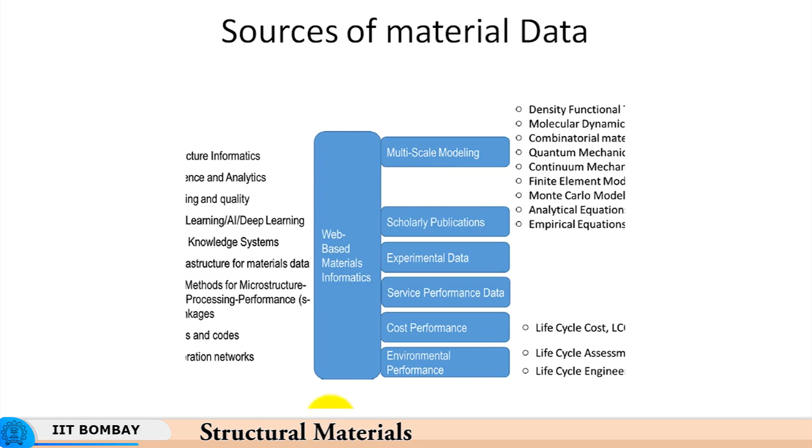You have standards and codes as sources of material data, but then these are kind of rigid. So, these are not dynamic in nature. Standards and codes are the ones which remain unchanged over a period of time, but as you go on analyzing data coming from various sources, you might have to revisit the standards and codes and change them from time to time. So, this is how you have both static as well as dynamic sources of data coming in, and therefore an adaptive design approach needs to be deployed.

So, it integrates a database that is built based on domain knowledge. Domain knowledge is something which is well established facts. So, it integrates a database that is built on domain knowledge and includes material data of targeted properties and descriptors, a regressor, that is statistics based algorithms to regress targeted properties versus descriptors. So, basically you would like to correlate the targeted properties with the descriptors, meaning control parameters. Descriptors would mean parameters which are under your control, which would influence the targeted properties to the maximum extent.

So you would have a regression, or a relationship between the two, and then you would have a statistics based algorithm to design new experiments or computations by optimizing the selection from exploration and exploitation of regions and feedback from experiments and computations. So what it means is that it is not just the correlation that is important, it is the tool which you use for correlation, whether it is a neural network or a regression based model or statistics based algorithm. So whichever gives you the best accuracy of prediction has to be utilized in order to correlate the two.

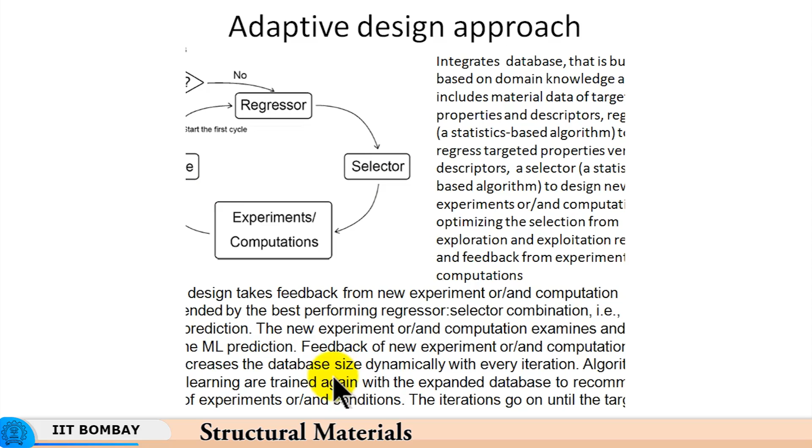So we come to what we call black box models and white box models. Black box models are accurate. They correlate the control parameters, namely descriptors, with the outcomes, namely the targeted properties or targeted material behavior. These black box models are accurate because they are based on reality, that is, they relate real descriptor data with real material performance data. On the other hand, we have white box models which are easy to explain because they are based on the laws of physics.

They are able to correlate descriptors with the targeted properties in a definite expression. But they are less accurate because many assumptions have been made. Many things are neglected because you want to keep the model simple. So what you are essentially doing is correlating the descriptors with the material properties in a more ideal situation compared to reality.

So that is how black box models become more accurate, because they correlate real descriptor data with real property data, whereas white box models are easy to explain from the viewpoint of the physics of the relationship between the descriptor and the desired properties. Black box learning models are like artificial neural networks, machine learning models, deep learning models and so on.

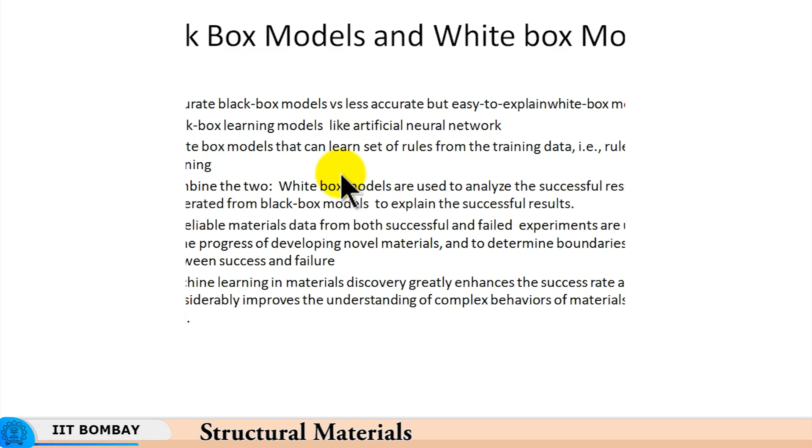So when you take a black box model, you have a prediction which is likely to be successful, and the white box model will do the explanation. So what will machine learning do? Machine learning, which is essentially a black box model, does many things. It integrates heterogeneous material data. So, material data that has typical characteristics of heterogeneity on account of multiple sources will get integrated.

When compiled into open accessible databases, the materials data finds applications in materials discovery, material selection, failure analysis and life prediction. So, all these things become possible because these are the performance metrics of the material, these are targeted properties of the material, basically the life prediction or the number of cycles to failure, or mechanisms of failure and so on. So, you have a database correlating the material properties, processing conditions, structure of the material, chemical composition with the mechanisms of failure, the life under certain service conditions and so on.

Material data is analyzed to establish relations between materials, processes, microstructure, properties and performance. Okay, so, to establish PSPP relations. So, we are not always trying to develop a new material. Even among the existing materials, what we establish is based on the data again, which essentially means experience. Experience, when digitalized, becomes a lot of data. So, the big data. This data can be analyzed to establish the entire processing route to convert the material or to enhance the properties of that particular material.

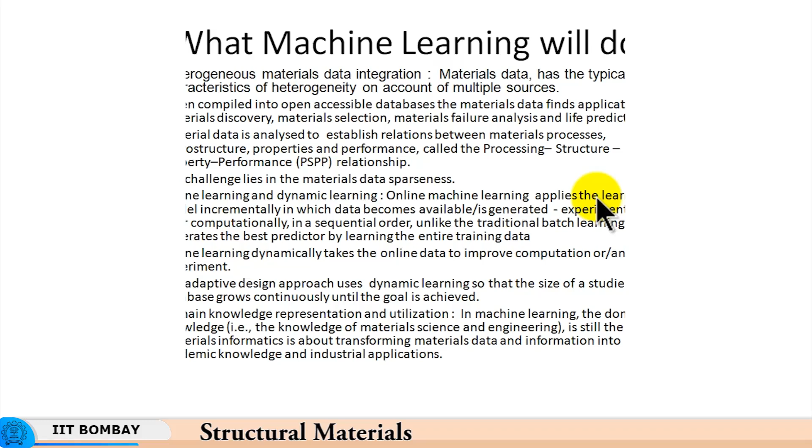So, we have domain knowledge, that is knowledge of material science and engineering, which is the fundamentals which we have learned so far in the entire course. So, that continues to remain applicable and is still in the core. So, material informatics is about transforming materials data into information, into academic knowledge and industrial application. So, basically we are trying to digitalize the core domain knowledge, and then transform it into industrial applications.

So, this is how we develop materials, applications of material informatics for material selection, matching with the product design. So, material selection consistent with the product design and the functional performance of the product, modeling and simulation for property and failure prediction, matching materials and processes to manufacture the product, matching with the in-service performance, efficiency of materials.

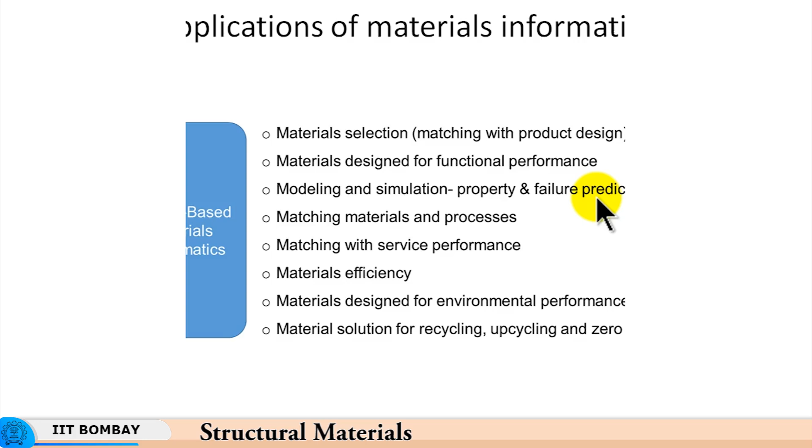So, basically web-based materials informatics can be applied for so many aspects of materials. So, material solution, so right from material selection or material manufacture to its recycling, at every step you use materials informatics.

So, I will show you a brief demonstration of the parameter selection for deep drawing of circular cups. We know that in sheet metal forming you draw a cup using a deep drawing process. So, a flat sheet of certain diameter and certain thickness is the raw material, and since we are drawing circular cups, so cylindrical cups, right circular cylinder is the final outcome, we use a circular blank or circular piece of sheet metal of a certain thickness, and we manufacture this part using what is called a deep drawing process.

So, now the parameters here are the blank holding force, the mechanical properties of the material, especially the plastic strain ratio, the degree of anisotropy of the material, that is normal anisotropy of the material, the planar anisotropy of the material. So, basically these two anisotropy parameters play a big role in this. The strain hardening exponent, rate sensitivity index. So, these are some of the mechanical behavior parameters which influence the deep drawing process.

And then you have lubrication, the blank holding force, the velocity of forming, the temperature. So, all these play a role affecting whether the process will be successful or not. Plus another parameter is draw ratio, which is how ambitious your draw is. For example, if you are trying to draw too deep a cup, in a deep drawn part, how deep is deep? So, if you are drawing an excessively deep cup, then the chances of failure are

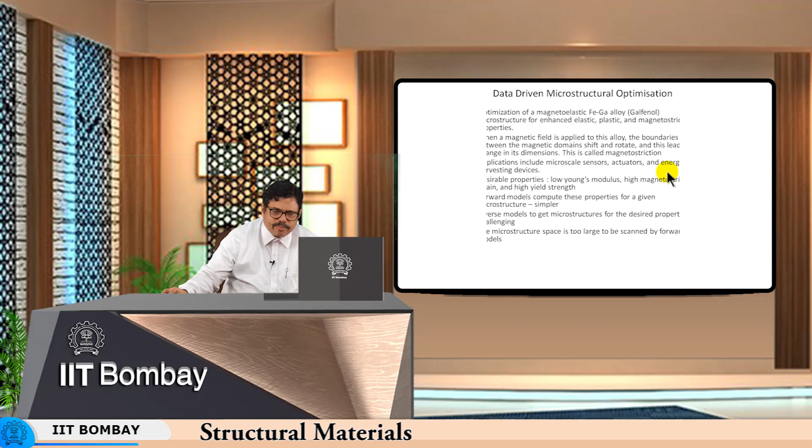So, you can use this property of magnetostriction, but then you need to optimize the microstructure for the kind of actuation you might want, or the extent of energy harvesting, or the parameters you might want to sense, say displacement. So, desirable properties are low Young's modulus, high magnetostrictive strain and high yield strength, because if you have high magnetostrictive strain, then only it will be able to measure the parameter as a sensor. High yield strength is important because it should be durable and handleable, as well as able to take the mechanical loads that might come onto it if it is going to measure mechanical quantities.

Again, low Young's modulus, because it should deflect in an elastic manner. So, it is important that the Young's modulus should be low, so that it should be able to deflect under even a small amount of load.

So, forward models compute these properties for a given microstructure. Properties can be predicted by microstructure. You correlate the microstructural features with the kinds of properties, Young's modulus, magnetostrictive strain and yield strength. Inverse models get microstructures from the desired properties. That is what we were talking about even in the previous case. So, you start with the performance metrics in an inverse model.

You want desired properties, you want to have certain Young's modulus based on the extent of elastic deflection that is expected, the extent of magnetostrictive strain that is expected. So, you would take these properties and then construct the microstructure. You would work out the microstructure that would give you these properties.

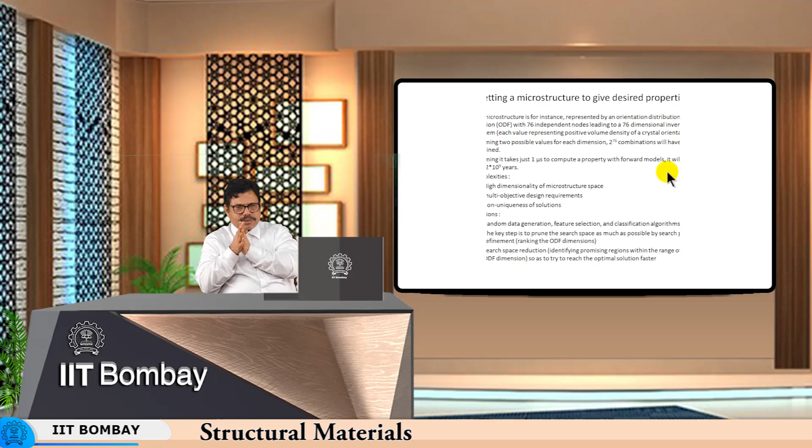So basically you do search space reduction or identify the promising microstructures and then try to reach the optimal solution. It involves a large amount of classification of these microstructures, reduction in the microstructure space to reach the final condition.

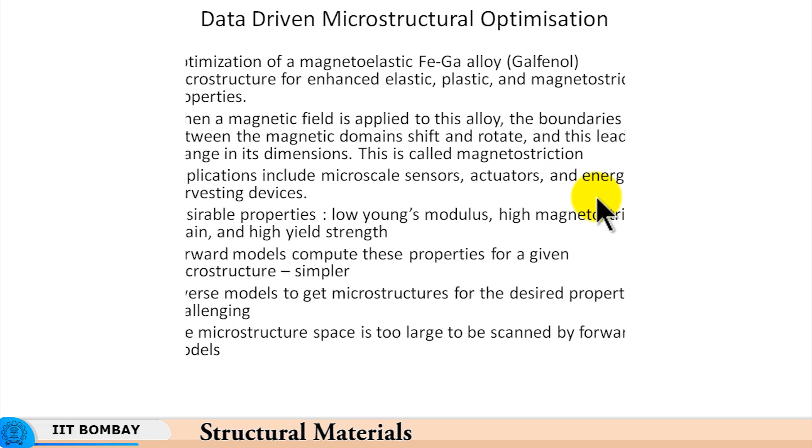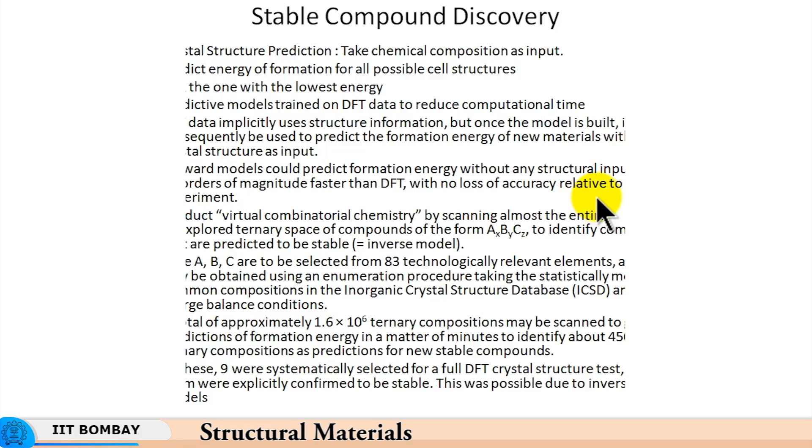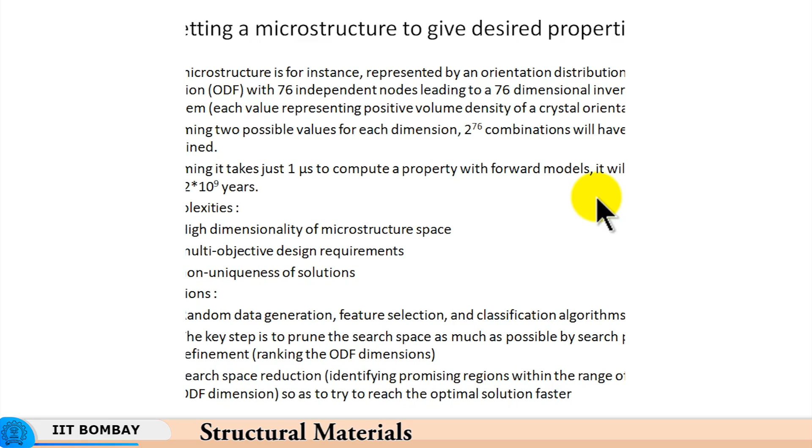And again, you will not be able to get one single microstructure, you will get a bunch of microstructures which could possibly work out. For example, in the previous case we had 8 microstructures which were explicitly confirmed to be stable. So it is not a model giving you just one value, there are 8 possible solutions to the same thing. That is the reason why getting a microstructure to give desired properties is a complicated problem.

So let us appreciate the role of material science in design and manufacturing. Design and manufacturing are the macroscopic domains, material science is a microscopic domain, and material informatics therefore bridges this significant gap between material science and macroscopic design and manufacturing, right.

So we have a big difference in the length scales. Material science operates at a very small length scale, very small time scales also, whereas manufacturing operates at much larger length scales and time scales. Design and manufacturing is largely concerned with predictions of macro scale properties, effective properties and performance of the engineered components and devices. Material science and engineering is focused on fundamental understanding of the physical phenomena occurring in the materials at multiple length and time scales.

Multiple length and time scales responsible for delivering these properties and performance characteristics. So basically, material science is about the physics or fundamental understanding of the physical phenomena which leads to the properties and performance characteristics, whereas design and manufacturing is largely concerned with the outcomes. Basically it is concerned with the final performance, the microstructure which will give that performance, the mechanical properties that will give that performance. So it is concerned mostly with that, which are macro scale in nature.

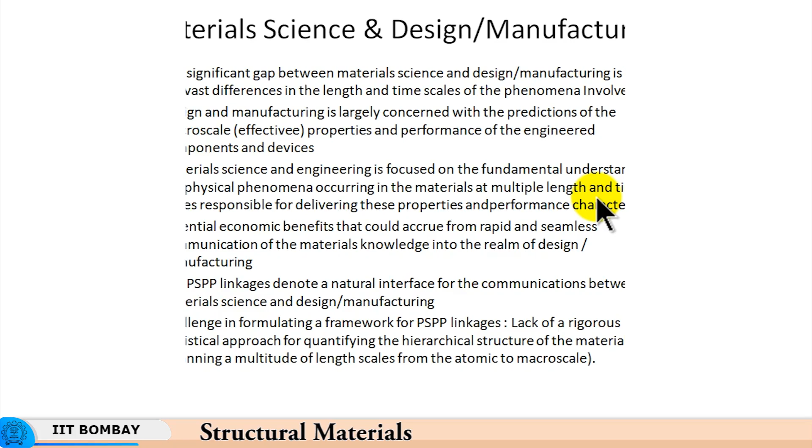So, the challenge is in formulating a framework for these linkages, because there is a lack of a rigorous statistical approach for quantifying the hierarchical structure of the material, spanning a multitude of length scales from atomic to macro scale. So, we are able to measure different attributes at different length scales, but the bridging of these gaps is something that remains to be done. That is what we had seen in the previous slide also, right in the beginning of our discussion. So, this is the challenge of going from the atomistic scale to the manufacturing and subsequent performance related scales.

So, for our understanding, the role of material informatics is that material advances will contribute to manufacturing advances and new products. Because everything is dynamic, there are going to be more and more tools coming in for generating material data. There are going to be new materials generated. So, material advancements will take place, contribute to manufacturing advances, and generate new products. Materials informatics will become the materials handbook of modern times, because the materials informatics handbook can grow to infinite size, to an infinite dimension, and using computational power you can extract whatever information you want from this handbook to fulfill your purpose.

And then you have a hierarchical nature of materials informatics. You have data driven identification of the statistical measures of internal structure of the material and their use in establishing high value, robust and reliable property, structure and performance linkages. So, basically you want property, structure, performance linkages expressed as low computational cost reduced order models.

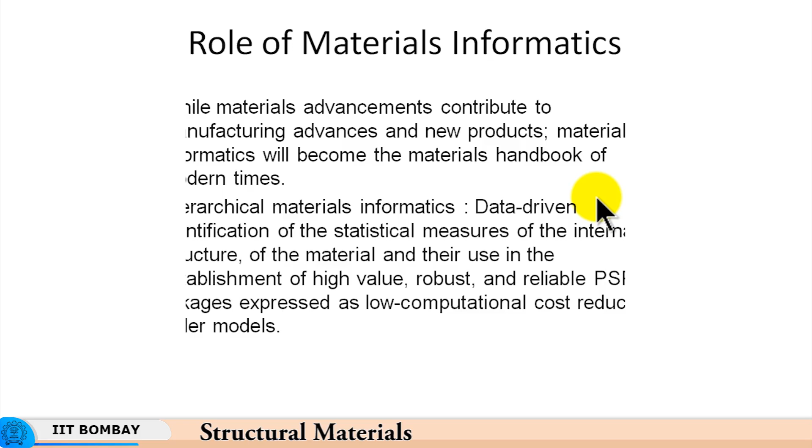So, a few examples of PSPP linkages involve the relation between the complex porous structure of transport layers in polymer electrolyte fuel cells and the effective diffusivity. So, you have a polymer electrolyte fuel cell having transport layers, right. These transport layers have a porous structure, and the complex porous structure has to be related to the resulting diffusivity. So, this is the property, structure, performance linkage.

Relate the two phase microstructures in a steel inclusion material system to the effective plastic properties. So, you have two phase microstructures. So, now you have steel and inclusions. So, now basically you are trying to relate the effect of inclusions, the inclusion morphology, distribution of inclusions, inclusion size, the mean free distance between two inclusions.

So basically there are a number of parameters characterizing steel with inclusions in place, and how damaging they are, or how they influence the plastic properties. So again this is done through PSPP linkages. Now these linkages would be a black box linkage as well, right. Similarly, complex porous structure would not be through a fluid mechanics type of an approach, but it would be through a black box type of an approach, like machine learning type of methods.

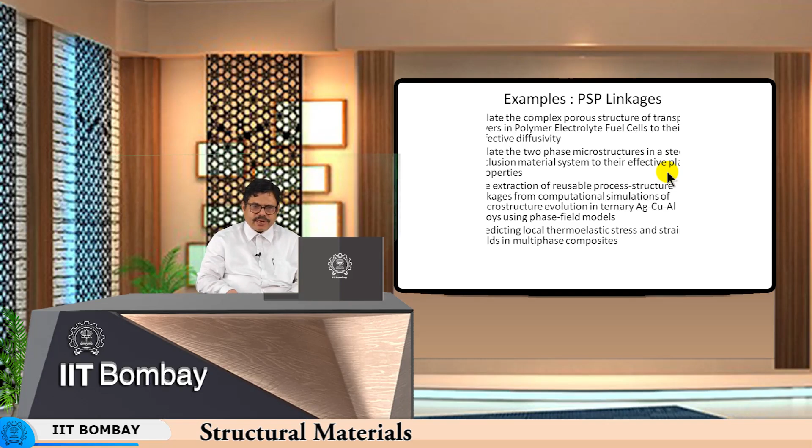Predicting local thermoelastic stress and strain fields in multi-phase composites. So you have thermoelastic stress. So thermoelasticity is basically a property of the material where the material responds to a change in temperature, right, with a change in shape. So if you heat the material, the shape will change. If you cool the material, the previous shape is retrieved. So that is why it is called thermoelasticity. So if you cool the material, the shape you started with will get retrieved.

So this is slightly different from what we do in, let's say you have a shape that is made at low temperature. Let us say you make a particular shape at low temperature and then you heat it, it will come back to the shape of the raw material. That is what we mean by thermoelasticity.

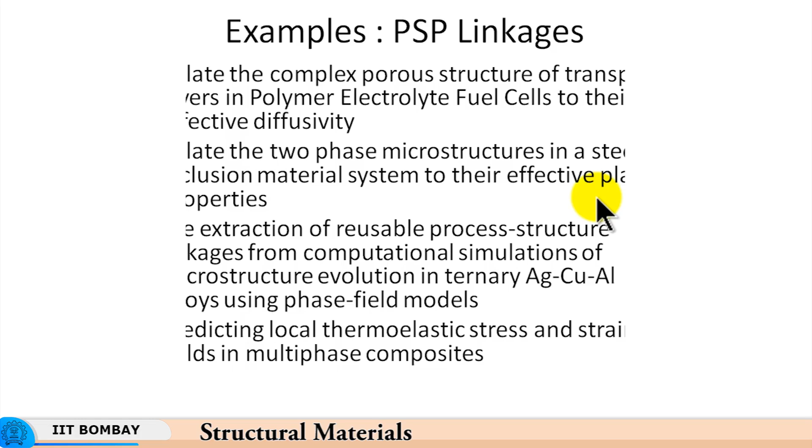So to summarize, materials informatics is about discovery of new materials and prediction of their behavior under various conditions. Materials informatics is about obtaining a material or a processing route that satisfies a number of performance requirements through the process, structure, property and performance linkages. Materials informatics is about analyzing the large body of reliable, high quality, heterogeneous, multi-source data to extract rules about material behavior, processing conditions, crystal structure, microstructural predictions, properties, etc.

It is about a hybrid approach using black box models and white box models together to enhance understanding of new materials as well as speeding up the selection of materials. So with this I think we have some background about materials informatics. I would urge you to generally not get bogged down by the jargon. This whole lecture is about familiarizing you with what materials informatics is and what it facilitates.

Basically our handicap is as far as the processing of data that is available. So digitalization of experience that one gets, and continuous growth of the body of data that is going to be available in future, and continuous growth of the tools and processes which will be available to process that data is something which brings materials informatics into the limelight, and so that is how the potential of materials informatics can be used for generation of new materials for new products.

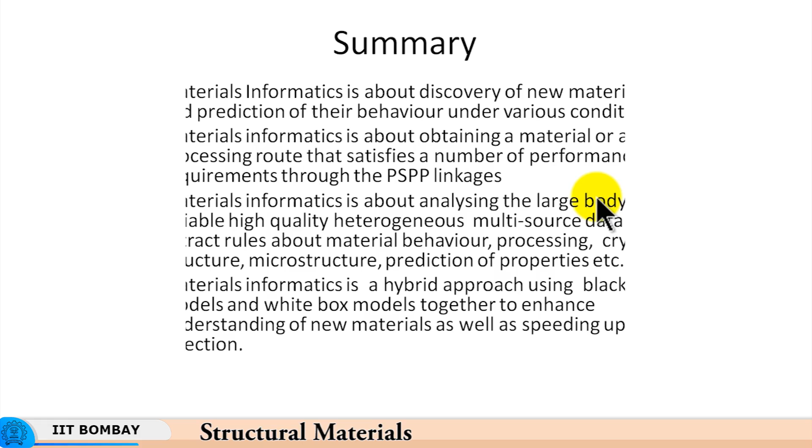So I think you remember the power of materials informatics rather than getting lost in the different tools and techniques that are involved in materials informatics. It's a very big field, and it cannot be covered in 1 or 2 lectures, but these 2 lectures are meant to just make you familiar with the subject. It does not give you any expertise, but it gives you a fair idea about what it entails, whether you should get into it or not.

So basically, what kind of orientation or what kind of education you would need in future to get into this is indicated by this. So this lecture is mostly indicative in nature about what kind of education you would need to really do materials informatics, and what is the kind of power of materials informatics from a user's perspective.